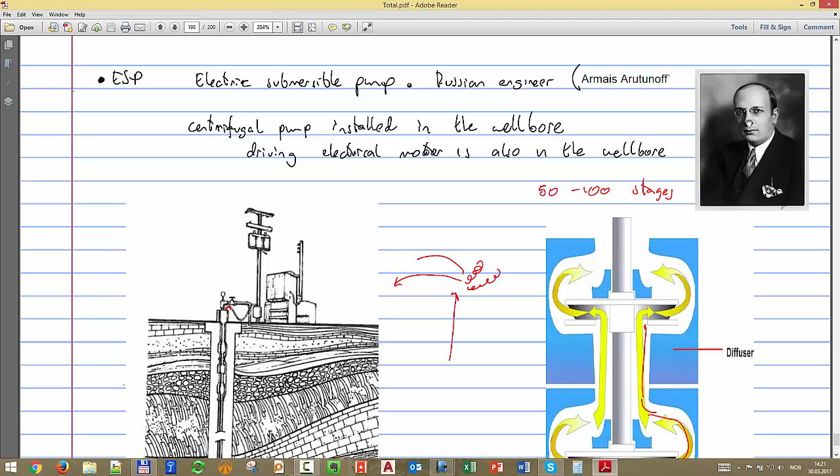And you have main manufacturers of ESPs: Schlumberger, Baker Hughes, a company called Wood Group, and one more, but I don't know. These are the biggest, but one of them, the main inventor with the patent, was the first one to try to put the motor and the pump inside the wellbore, which really made a huge difference in production.

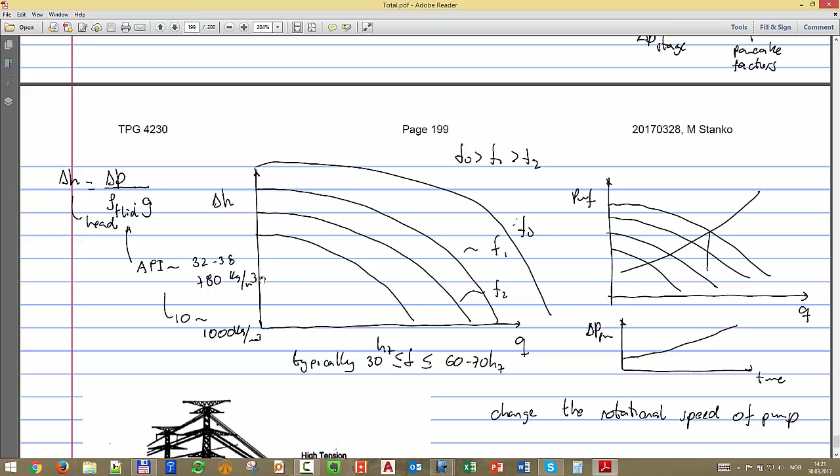Okay, so here were more generalities. I guess you had some theory about pumping, so this is not completely foreign to you, but it looks just like an inflow and available pressure curve, which makes sense. It's like something that gives energy, and it also makes sense that when we increase the flow, the delta P will be less, what it can reach is less.

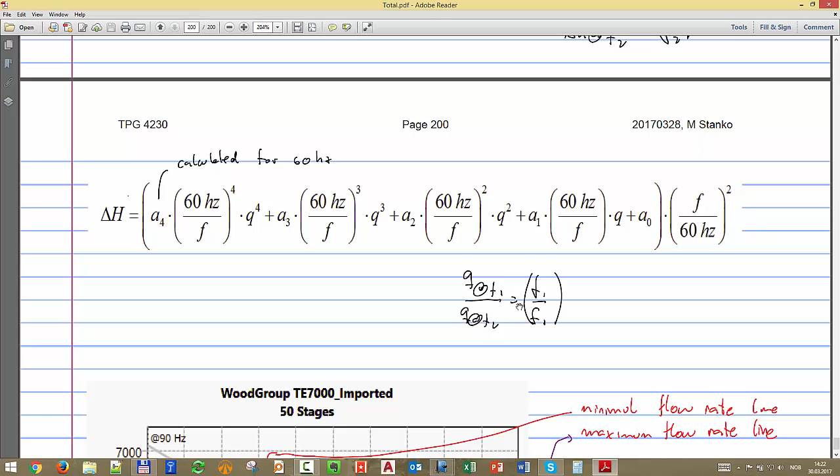We also saw what happens with frequency, how we change frequency, and how we scale the equation. Basically, we say that the head is scalable with the square of the frequency ratio, and the ratio between the rates is also proportional to the ratio between the frequencies.

That's not the most popular option to do in subsea wells. Why? Because you have to intervene at least, I think the longest might be around 2 years, but if you have problems at 6 months, then you have to make an intervention, and it's a big thing to do subsea to change something. Remember that the pump is screwed in as part of the tubing.

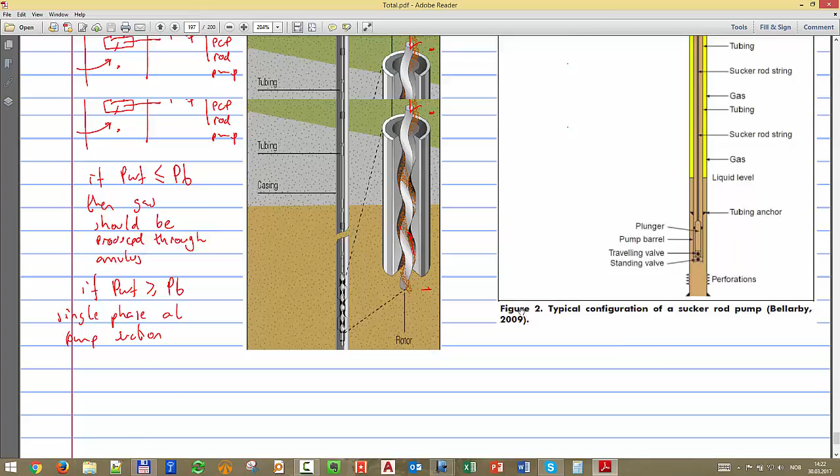I think we had a picture someplace of this typical well that you have to remember to sketch also. If someone wakes you in the middle of the night and says make a well with an ESP, you have to be able to do it.

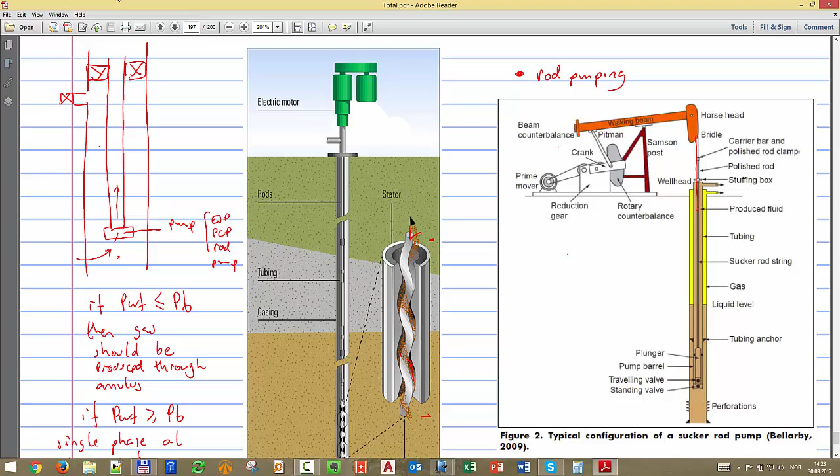So in that picture, it's really screwed in, part of the tubing. So to pull it out, to make maintenance, to observe what happened, you have to pull the whole thing. You have to take out the Christmas tree. You have to take out the tubing hanger. Then you have to take out the tubing. So it's a big operation. You have to kill the well. You have to put a plug. It's a big operation, so it's something we usually don't want.

It's not very popular, unless - and we are going to discuss that case - we have an exercise now in class for when you have a dry Christmas tree, when you can have a drilling module and access intervention to the wells whenever you want. It's also very important when you have low GOR, heavy oil, for example, and when you have large amounts of water.

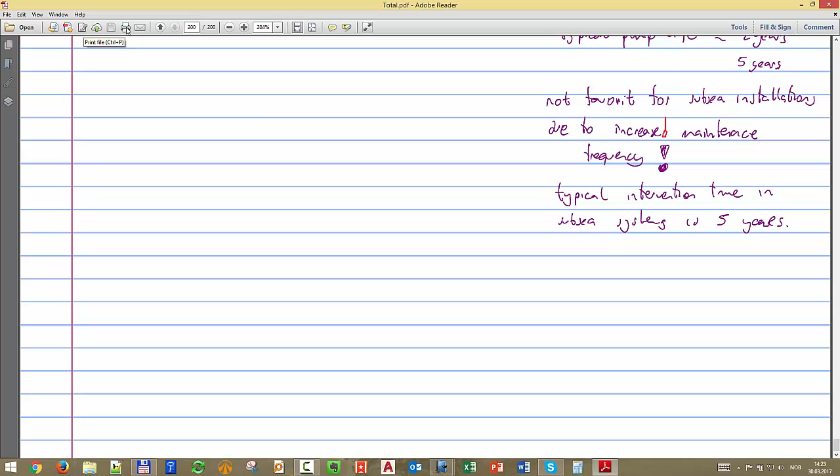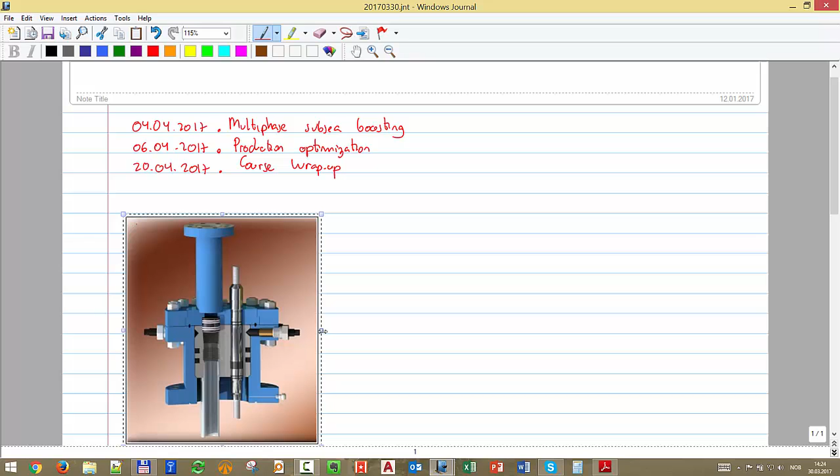So let's first show you just a picture of this penetrator that I told you about, that is in the tubing hanger. So here you see that's the tubing. The hanger is the gray part, and then you have the penetrator that goes through.

It's a hole, you could say it's a potential leak path, where you have the cable going from outside. Here you have this variable speed drive, you have the main transmission line for electricity, or a diesel generator, and it goes inside the well. There are many parts, and this is for a very simple onshore well. When it's subsea, it's more complicated.

So now, something that we have seen so far - what kind of, so first we say, limitations so far, operational limitations of ESPs.

So one of them is the frequency. Frequency has to be usually between 30 hertz and 60 or 70 hertz. You can take it all the way to 70, maybe.

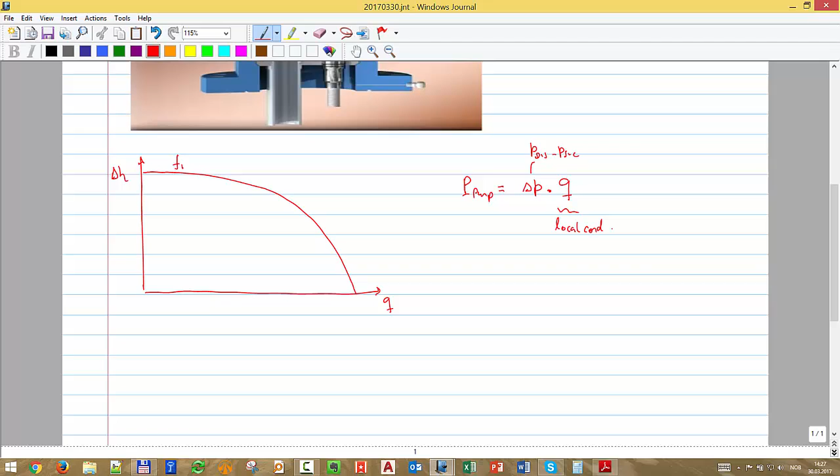Delta P, so P discharge minus P suction, times the Q, and the Q is in local conditions, and these units have to match. That's exactly what we are giving to the fluid - that's how you compute the change of energy of the fluid when it comes in and out of the pump.

But on top of that, the pump is using much more energy because you have some losses. In any process where you want to give energy to the fluid, you cannot give 100% of the energy - you have to waste a lot just to give it, and we will see where that comes from. So you have one term called hydraulic efficiency, and another term called mechanical efficiency. These should be divided: hydraulic efficiency times mechanical efficiency.

The hydraulic efficiency is basically due to many reasons, and I don't want to dwell too much into it, but it's basically because of fluid friction - friction between the fluid and all the walls that you have, which might be stationary or rotating.

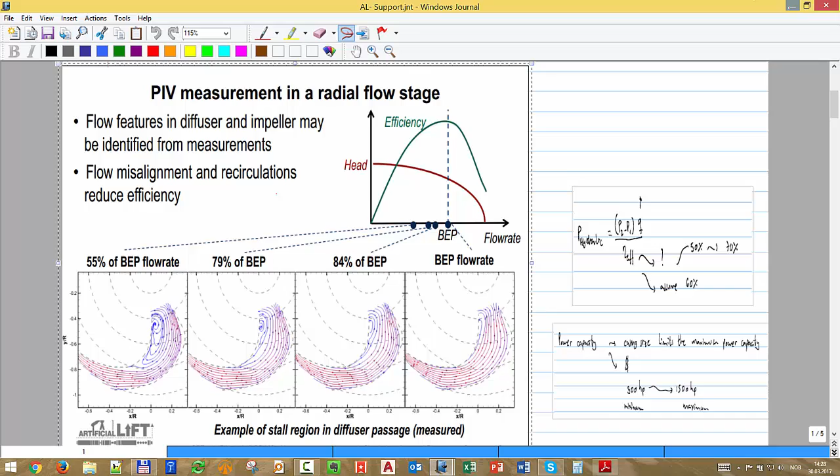Let me pull up an image that I think is very nice. You see you have the same head versus flow rate, and that's usually how the hydraulic efficiency goes. You have one rate - at that particular rate, that is what we call the best efficiency point.

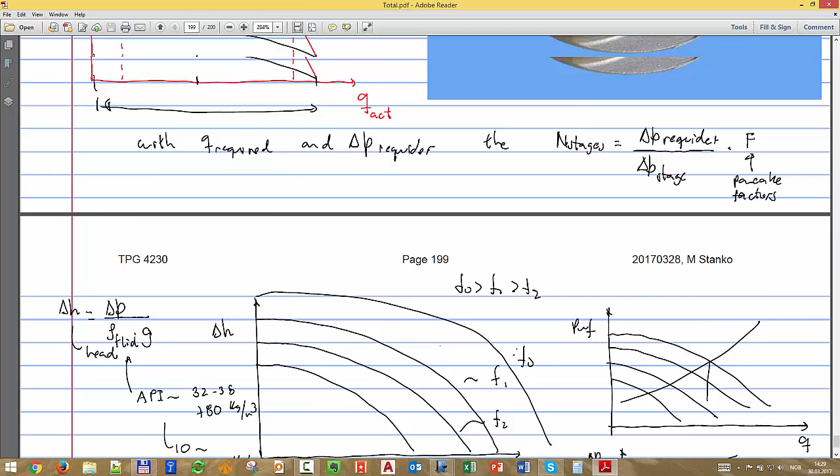At that rate, what happens is that the fluid goes first perpendicular from the top, and then it spreads radially. When it enters at a certain rate, it has to be completely aligned with the angle that you have.

If it's not aligned, if it's inclined or deviated, the fluid will start to separate. If that's one of the blades of the pump and it's exactly aligned, the fluid will follow exactly the profile of the blade. But when it's not aligned, the fluid will start to detach and create eddies, and the eddies cause loss of energy.

You can see that very clearly - that's actual measurement, taken with particle image velocimetry. You don't have to know what it is, but that's actually measured. You see at the best efficiency point, the lines follow exactly the path between the two blades, without anything else.

But when you move and change the rate, the angle changes, and when the angle changes you start getting these recirculation areas. So the conclusion is that you have one rate at which you have the best efficiency, that you have designed your blades for. When you go outside that rate, either above or below, the efficiency will start to go down immediately. Keep that in mind - the efficiency curve looks something like that.

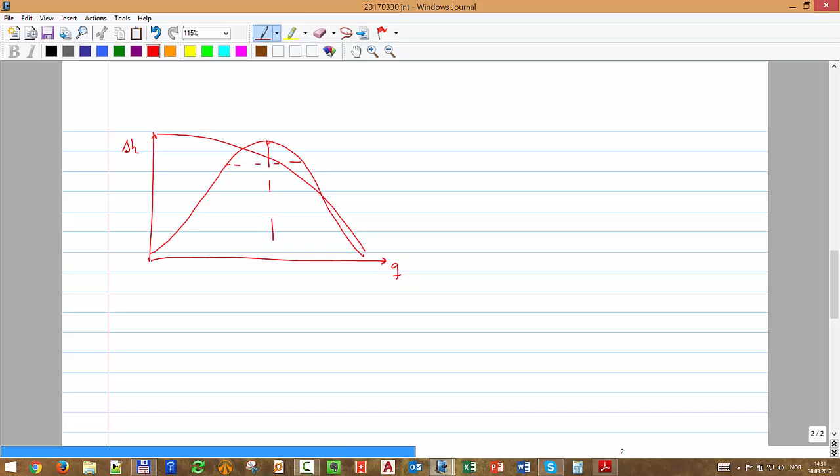Let me put that image here. I have delta H versus Q, and I have my curve here, and I have that efficiency curve that does something like that. When I change the frequency - that will be frequency 1 - when I go at a different frequency, frequency 2, the curve will move slightly to the left, and that efficiency curve will move to the left too.

So now the best efficiency rate will be shifted to the left. But you don't have to worry too much about it - just know that for each frequency, the maximum efficiency shifts. And of course we always try to be close to that rate. If you're going to design a pump, that's going to be the rate you want to produce from the well - you want that rate to coincide with the best efficiency point of the pump. But sometimes it's not very simple - we cannot ensure that we will be at that point all the time, and we will see several reasons why.

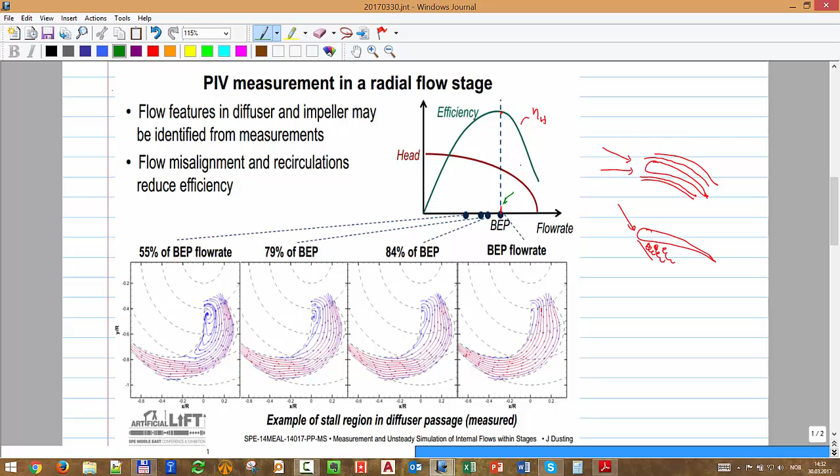Now there are some things - maybe I can show you that, since some people were asking how it looks. That's a relatively small ESP, but there you have the impeller. I cannot open it, but the fluid should be located like that.

Okay, the fluid is coming through that direction, that rotates, and then the fluid comes through this side. That's rotating, and the fluid comes from that side.

Here, if I take out that cover, I will see exactly those blades that I showed you before. Then you see we have one part that I told you is the diffuser. The fluid goes exactly out and then comes back again in this diffuser.

This diffuser again is a series of blades that expand, so the area when you enter is small and the area when you go out is big. They redirect the fluid, if you see here, through the other stage, through this small disc.

More or less, so I'm going to pass it around so you can see. Some things to note: this is missing what is driving this impeller. All of that is fixed in place, and this one is rotating, right?

So what is giving the motion to this is an axis that goes through all of them, but the axis is in place, and this is free to go up and down. So you need, if you see here, a washer that is going to be in mechanical contact with this part.

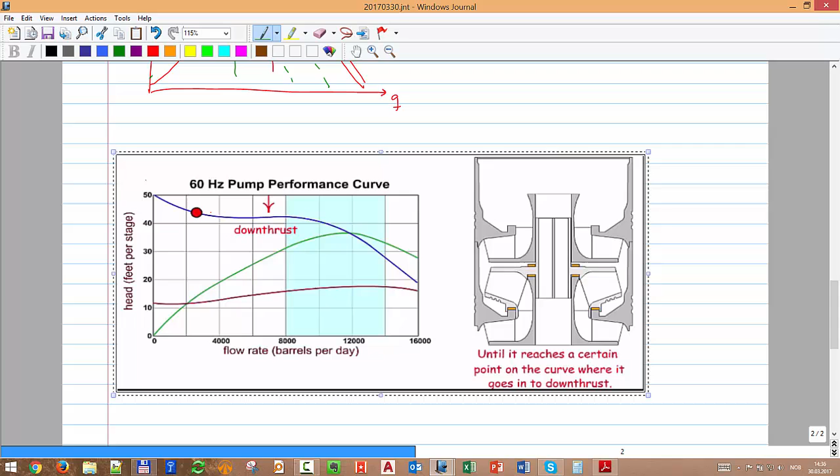So that's what we call down thrust, because the impeller is laying down on the support, on the hub of the pump. Now if we go the other way, to a very high rate, what will happen is exactly the opposite.

It will detach from that support, but then it will start hitting on the support in the back. You will see there is a small ring that is in the plate. And again, you have wear against a lot of rotation, a lot of heat, a lot of wear, and because of that you have failure.

So that's why you cannot be operating at either a very high rate or a very low rate. You have to be within a range where you have contact small enough such that you don't have important wear, so you don't accelerate the normal lifetime of the pump.

Is that clear? So that's just to show you, for each frequency you have to be within some maximum rate and a minimum rate that you have to operate.

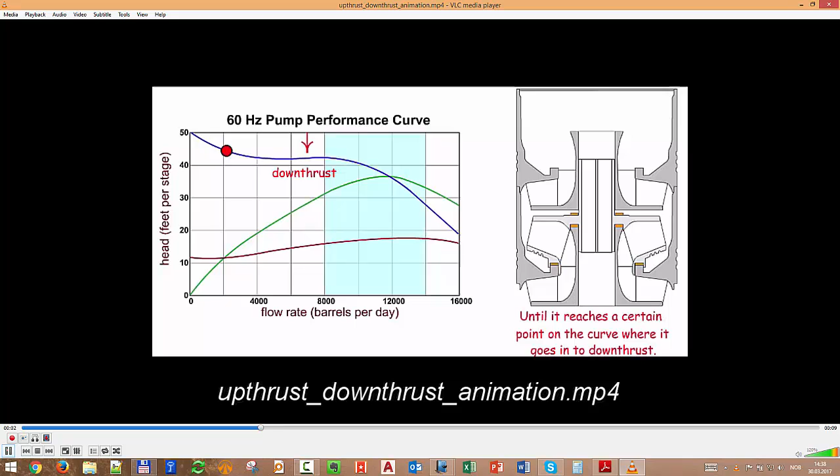Okay, so I define a region where I have an expected normal life of the pump, if everything else is okay. Otherwise, I will have excessive wear.

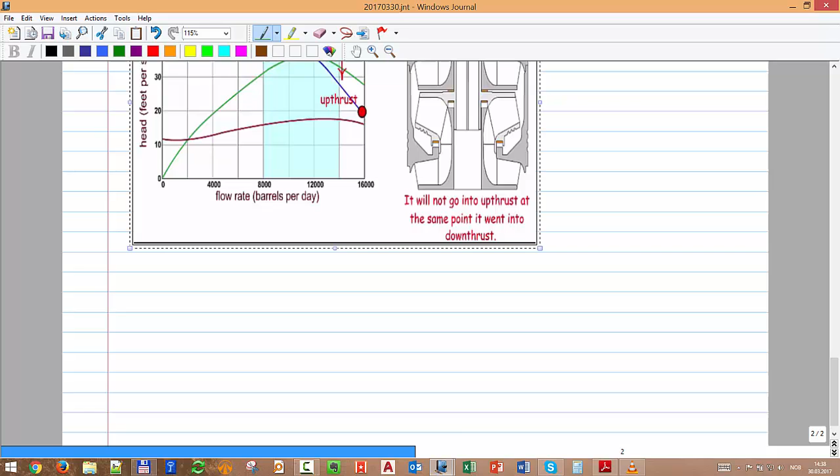I think here we have another nice figure showing something like that, where if you exaggerate the distance between the impeller and the shroud, it looks something like that.

So that's why, in theory, we have this very big range that we can use, but in practice I cannot. It's really not recommended that I operate below that or above that, so I limit very much my operational envelope of the pump.

And for different frequencies, that's how the curves go. Here I have what will be my Q minimum and Q maximum. So those are the main two reasons to avoid up thrust and down thrust.

And to avoid too low efficiencies when I increase or decrease too much the rate, that's the two things. I could just tell you the pump has two lines, that's all, but now you know the reason, so it's easier to remember in the future. Why do you have these two lines? It's low efficiency, you have this separation phenomena, and also you have up thrust and down thrust.

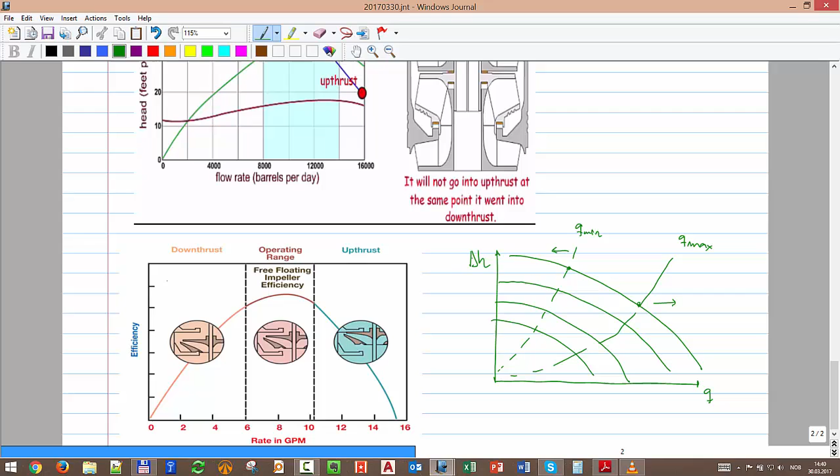At the end the area looks something like that, because you have Q max, you have Q min, maximum frequency and minimum frequency, and that makes a nice little box where all the Q delta P points have to be inside.

So for example, you go and run your simulations, and you say, okay, I want that particular combination. So I have to find a pump that will exactly cover all of them. Hopefully that's something we wish, but not always that it will be.

You remember this efficiency? You also have a line that goes a bit, sometimes closer to the minimum. It's called BEL, best efficiency line.

And it's telling you that's the rate. You remember where I had the maximum. You remember the curve of efficiency does something like that, so that's where I have the maximum. Then if I reduce the speed, it will be a bit more to the left, and so forth.

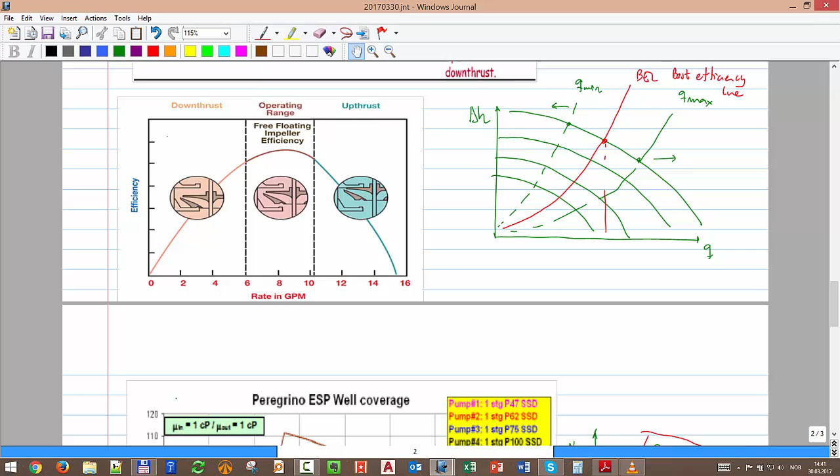So also that line, I should be operating relatively close to it. That means if I have two pumps, one that is maybe like that, very big, and another pump which is maybe like that, also very big, I will try to use, for example, this pump, the...

How do you call this color? Magenta? Yeah. My wife will be proud of me, huh? She's always asking, you cannot see the difference. No, I say, for me it's like red and pink. It's not pink. Okay, so we get into a small discussion, but now she will be proud.

So we try also, if possible, that it will be close to a good efficiency, because we want also to save.

Then one thing where I have a constraint: you see the operational envelope usually is like that, the suction pressure above saturation pressure. And also one more thing is the maximum capacity, power capacity of the motor.

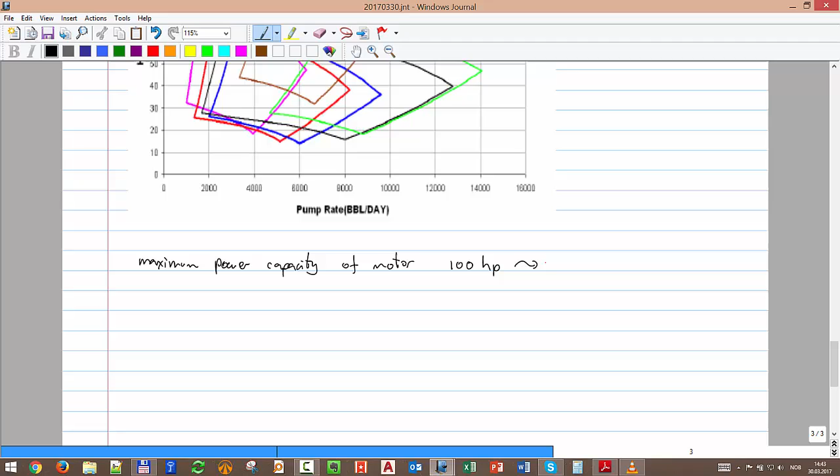So the motor usually can be anything between 100 horsepower to 1600. That's a very huge pump.

And you have to be sure also that the power you calculate, which is equal to delta P times Q over hydraulic and mechanical efficiency, has to be all the time less than or equal to the maximum power that I have installed.

And first, it's expensive to get a pump with a bigger motor, and then also the motor is bigger. So for example, if I want to put 1,000 horsepower in a very small casing well, it won't fit, it won't go through the casing.

So those are other requirements that we have to care about. And then there is another one that is called cavitation.

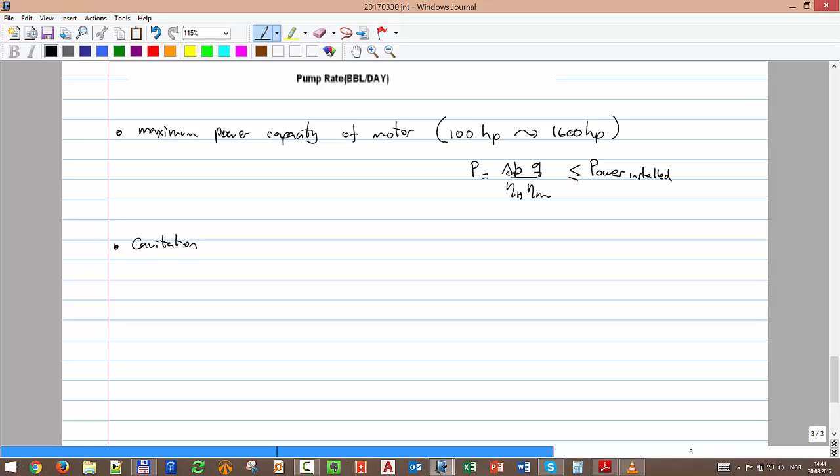And that is if we take the pressure, and that will be kind of the distance along the fluid, or in the flow path, from pump inlet to pump outlet.

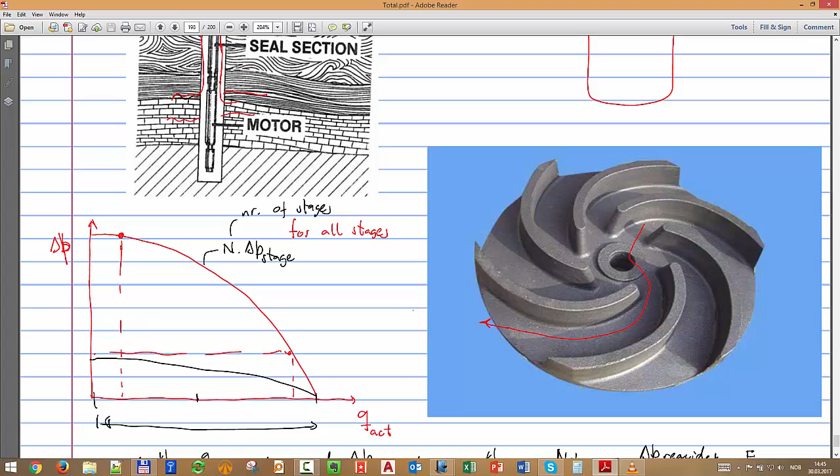Initially, when the fluid goes from the inlet all the way to the blade, it's going to have some losses, so it's going to have a drop in pressure, and the velocity is going to increase a lot because the channels are going to be made very narrow. Because of that, you're going to see a certain behavior.

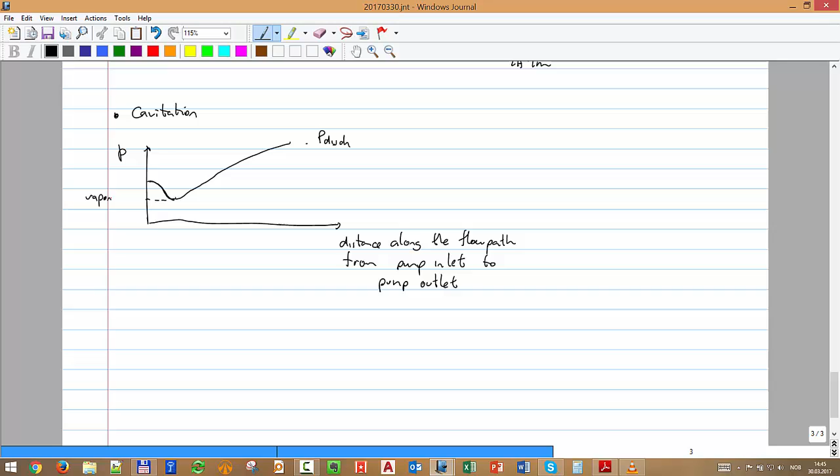Initially it's going to reduce, and then it's going to increase and increase until the pressure reaches the suction pressure, the discharge pressure. Exactly in this path it's very critical that we don't reach what's called the bubble point, the vaporization pressure of the fluid.

Because of that we have a phenomenon called cavitation. The fluid close to the wall vaporizes, becomes vapor, but then later on it will again have higher pressure, so it's going to re-condense, re-liquefy. But when it does that, let me show you the picture.

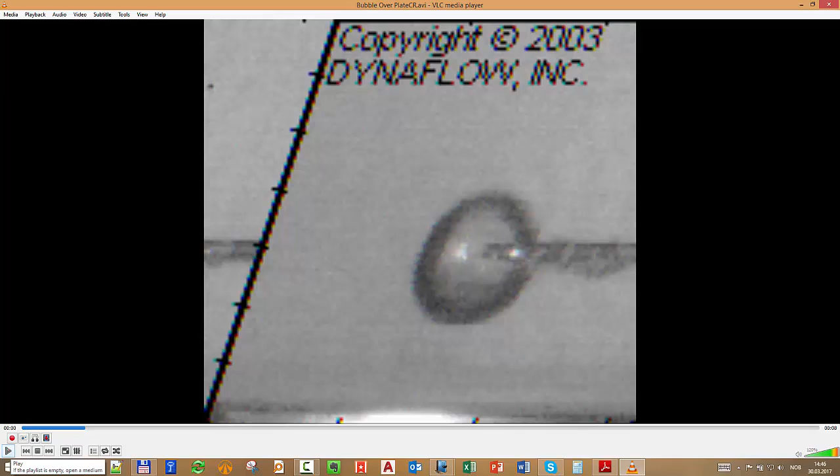In this case they are doing the same thing, but they have a small electrode, and they give a small charge to make the bubble vaporize, and you are very close to a wall. So when the pressure goes down, you reach the vapor bubble point, and you see after the pressure returns to a higher level how it hits the wall. In the collapsing process, this causes a jet of fluid to go and impinge on the wall. That's what we call cavitation.

Because of the repeated effect over time of all these droplets collapsing on the wall, we have wear of material, and we are going to be losing part of the blade.

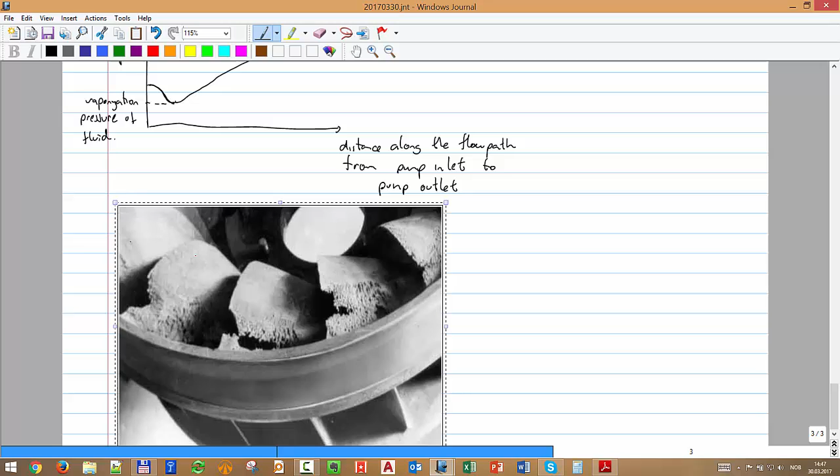I think we have some pictures - it's not exactly from an ESP, but you see how the damage can occur in the blades of the pump, which again reduces the lifetime. Again we have to pull out; we don't want to make interventions so often.

So what we do is just say that P at the suction has to be greater than P limit - that's not the vapor pressure, because there will be losses. P is the P at the inlet, and you have to be sure, not P at injection but P at inlet, that it's high enough that you are far away, within a safety factor, from that vapor pressure.

Usually we don't want to go into how it's done in practice, but manufacturers have something called NPSH - just to make you familiar with the term, net positive suction head. Remember, pumps started with pumping just water.

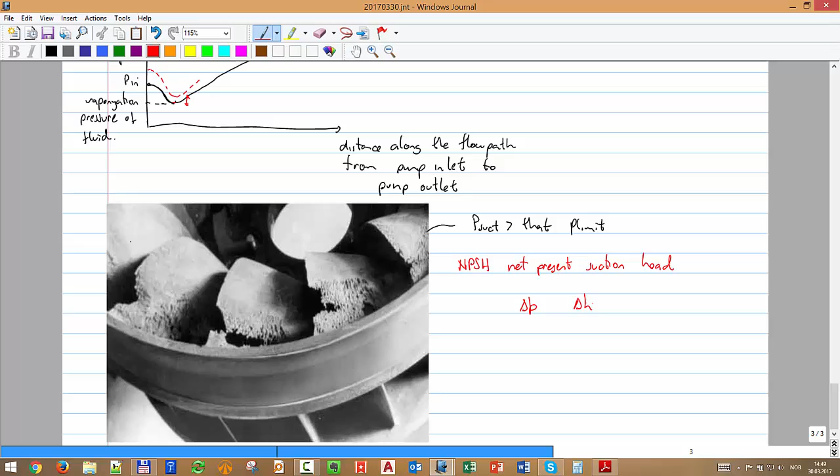It was later that someone started using pumps for oil, for any fluid you want, but people were working mainly with water, so they said, why do we want to carry delta P for everything? Let's just carry delta H, since we know density is 1,000. But then people started using oil, so all the time we have to make the conversion. The net positive suction head is given in meters, and then I can change that, using the density, to pressure in bar.

So if you see that term in a pump manual and don't know what it is - usually, if the flow rate Q increases, the NPSH is also going to increase. Why? When the rate is higher, you have more losses from this point to that point. So you should have a higher pressure at the intake, because you have more losses from the inlet all the way to the point where you're sure you have the lowest pressure and cavitation will occur.

But if you go to your pump specialist in your company and ask, what is the minimum pressure you want to have in the suction, they can tell you. So far so good - that's the place where cavitation occurs.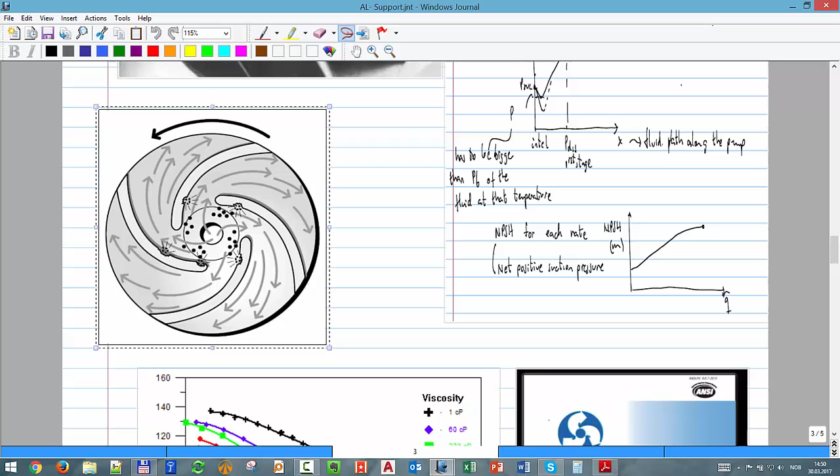We are almost finished - you might wonder, why do we use pumps if we have so many constraints? It's like we have this, no you cannot do this, not that. So that's the place where the pressure is the lowest, so you have the chance - pressure is lowest there, then pressure increases again, and then you have cavitation. It's like a small jet, but it's working all the time, making damage on the wall.

So then comes the last thing I want to say about pumps - the last restriction, the effect of viscosity. Usually the pump's effect of viscosity...

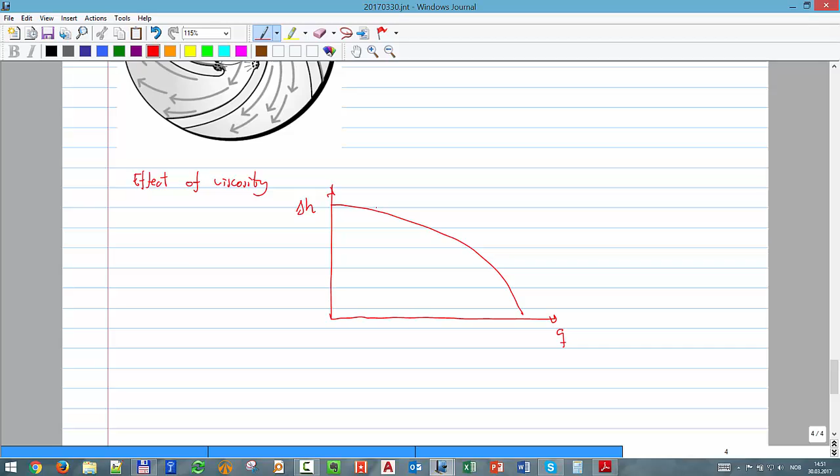Again, if we are using water, these curves are usually created for water, even for ESPs. They come and test it with water, so that will be viscosity equal 1, the viscosity of the water. But if you have another higher viscosity, the curve will look like that. You will have a reduction on the head that pump can deliver, and it's because of all of these losses. Remember that the curve is like that because of all the losses. So that's viscosity that is higher than water.

Also the lines are shifted, and we will see an example now. The minimum lines are shifted to the left, and also the maximum lines are shifted to the left. Also the efficiency is shifted. So at the end we end up with a very reduced operational region compared to what we had with just water. Viscosity reduces the operational envelope of the pump.

If you remember, sometimes oil in reservoir conditions can be very thin, can be 0.3 centipoise, something even less viscous than water, but sometimes we're working with viscosities of 300 centipoise in reservoir conditions, or 500 centipoise. So there, if you design your pump, you have to take into account the effect of viscosity.

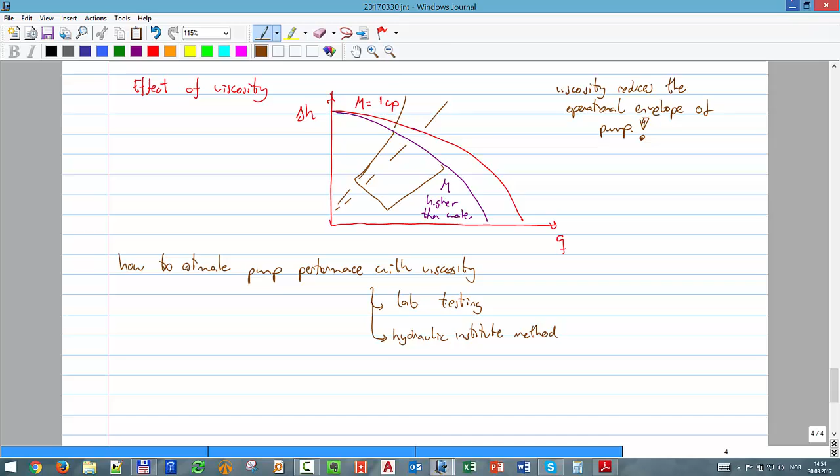Or another way, the most extended method to calculate that, is called the Hydraulic Institute. They took measurements for a lot of pumps, a lot of manufacturers, a lot of fluids, for different viscosities, and tried to compound and squeeze all of that into some correlations, some plots. I have programmed that for you in the exercise we're going to make, so you don't have to worry about it. But if you're curious or need to use it professionally, usually it's pre-programmed in software like Prosper and PipeSim. But it's good to know where that model came from.

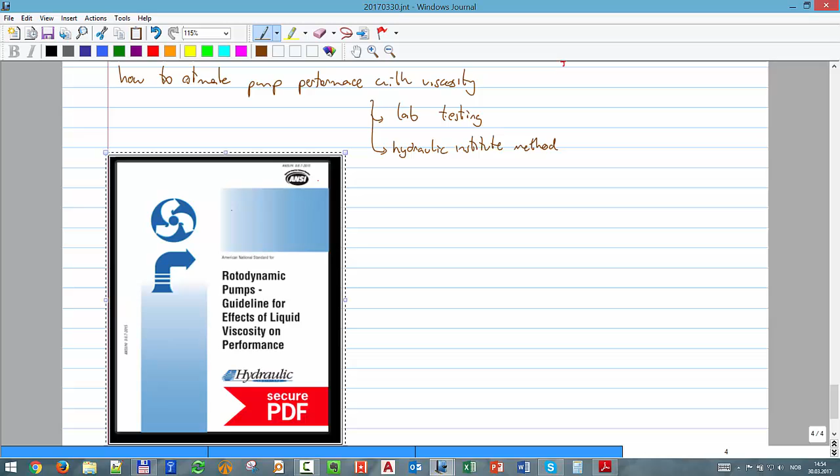But still people say it's not 100% accurate. I have read papers that say it's within 30% accuracy, or 50%, or 10%, so it depends really on the case. But at least it captures the main effect.

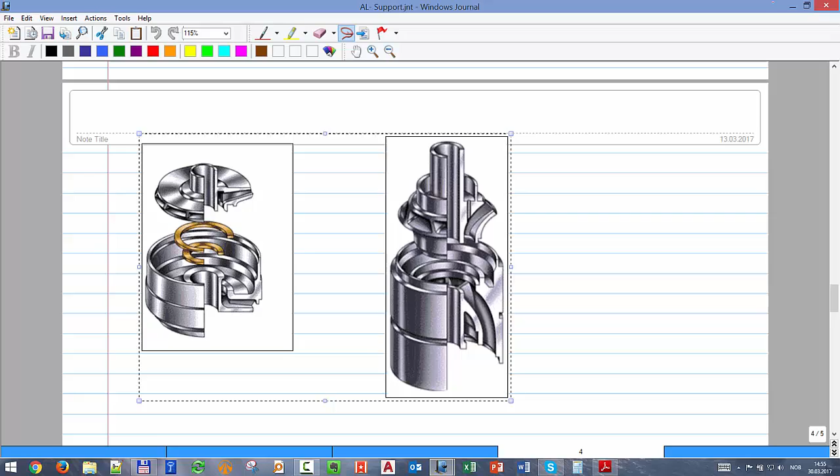So now, before I give you a break and we come back for the exercise, I just want to show you how it looks when you want the ESP to handle more gas. You see the traditional configuration to the left? It's very radial. The fluid goes through here, and then it goes almost exactly 90 degrees. You can see it in the impeller you have there. The fluid goes and has to change direction quite dramatically. This is very good for increase in pressure, there you don't need many stages.

But it's very bad for separation, because if you have some bubbles in your main fluid, the fluid will tend to go there, and the bubbles will tend to accumulate against the wall, and they will start to create pockets. Like when you see, for example, your impeller under gas, you will see that you have some areas where you have an accumulation of these gas pockets. Because of that, it reduces the flow area between blades, and that is detrimental to the efficiency and the performance of the pump.

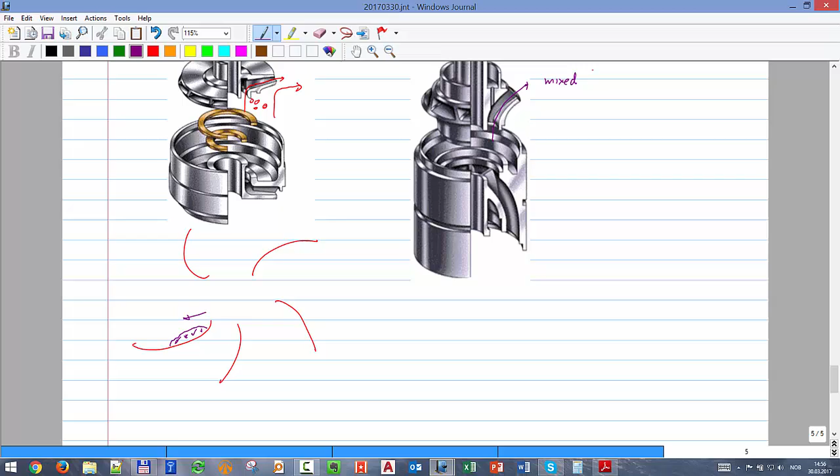While this other design, you see, is called mixed flow. Mixed flow means that it's a mixture between axial and radial, it doesn't go exactly one way, but something in between. The main disadvantage is that the delta P per stage is usually low.

That means I have to put more of them to achieve the same delta P. But the big advantage is that it's very tolerant to gas. When we say very tolerant, it's a GVF, gas volume fraction, and this gas volume fraction is at actual or local conditions, around 10%. That's a pump that is very tolerant to gas, because you avoid accumulation, you actually try to mix the fluid better with this kind of mixed axial design.

Why not put it exactly axial? There are some machines, like I told you, where the blade is something like that, and that's the hub, and the fluid just goes completely axial. That's a very poor drawing, but the issue is that doesn't lift the pressure much. You have a very low increase per stage, so you need a very large pump. When it starts getting very big, you have all these structural problems, with bending, so those pumps, called axial impellers, are not used in ESPs.

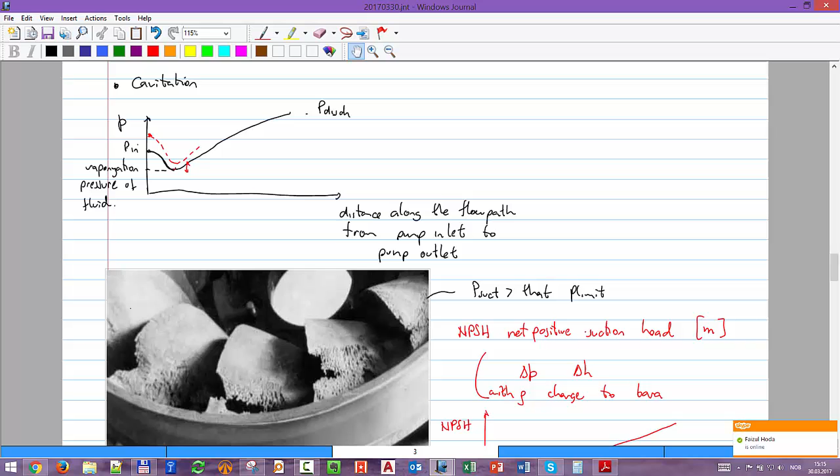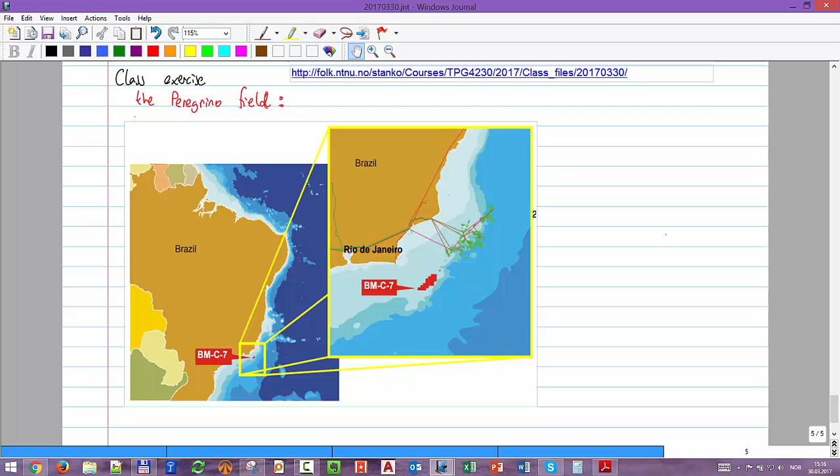Okay, so now let's do the exercise, it's in this directory, the common directory where we have all the class files, and it's going to be on the Peregrino field. Peregrino is an offshore field operated by Statoil, offshore, almost straight out of Rio de Janeiro.

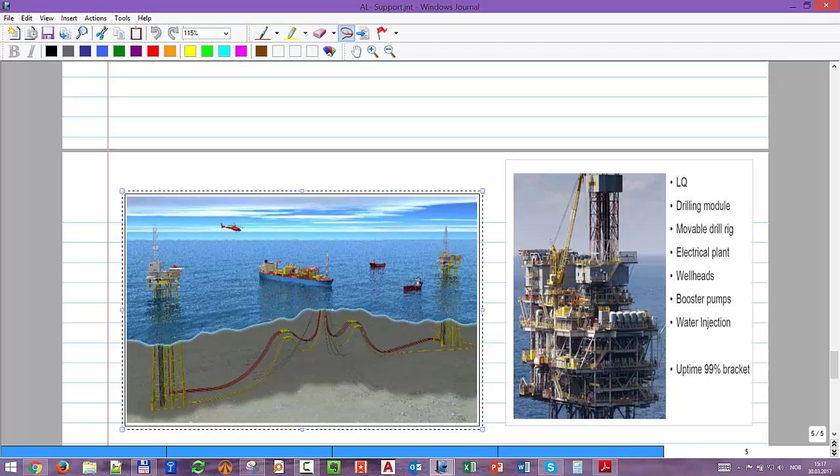Let's see, I think we have some pictures to show how it looks like. So there are two platforms, as I told you. When we have pumps, we want to have a way to make intervention, so we have two. Let me just put the other image right away.

Okay, and here I think I should expand the image a bit more. But the wells, you see the idea, one of them are drilled from this side to reach certain part of the reservoir, and the others are reached from that side. There you see the drilling tower where you can access every well and make intervention on them, also here.

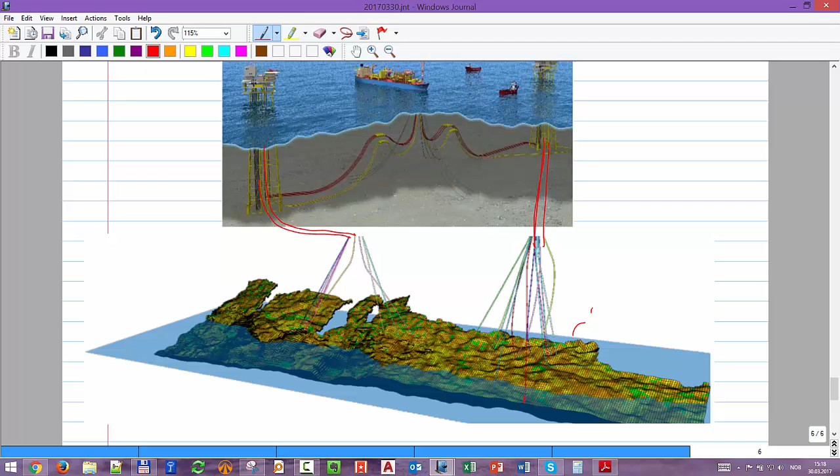And also we have oil producers, and the oil is relatively viscous. And we have water injectors that are injecting just in the, how do you say, the outskirts, is it the name? Flank of the reservoir. Yeah, the flank of the reservoir, exactly, that's the name I'm looking for, flank. Good to have some reservoir engineer that can pull you out of trouble.

And then later, so the system looks like, I have all the wells, okay? I commingle the production of all the wells, and then I have a pump, well actually here I have the separator, but I commingle the production through a riser that goes to the FPSO, to the floating FPSO, where the main processing is done. Okay?

And every well is producing, and they are almost at the same pressure, and this pressure in our exercise we are going to assume is 10 bar. Because it's like every well is producing to the same point, and I can control exactly the pressure of that point with the suction of this pump, and it will be 10 bar for us. So it's not a network, we don't have to solve a network, we can look individually at each well.

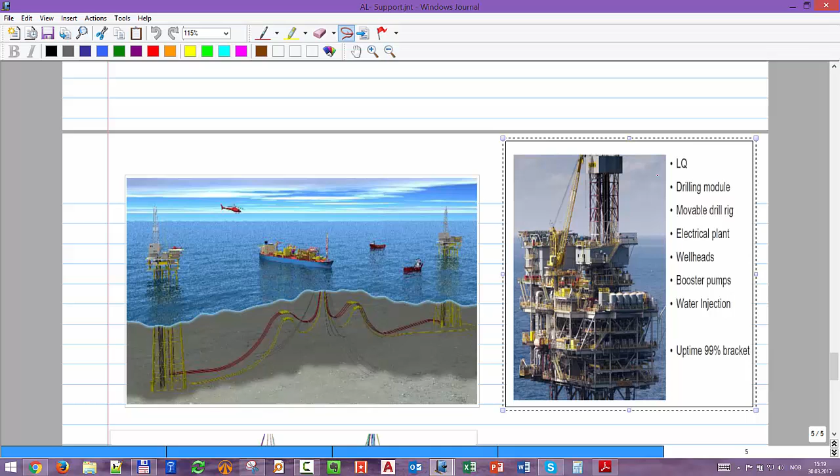So I think the other picture I had was of how it looks like. What does LQ stand for? LQ? Living quarters. Yeah.

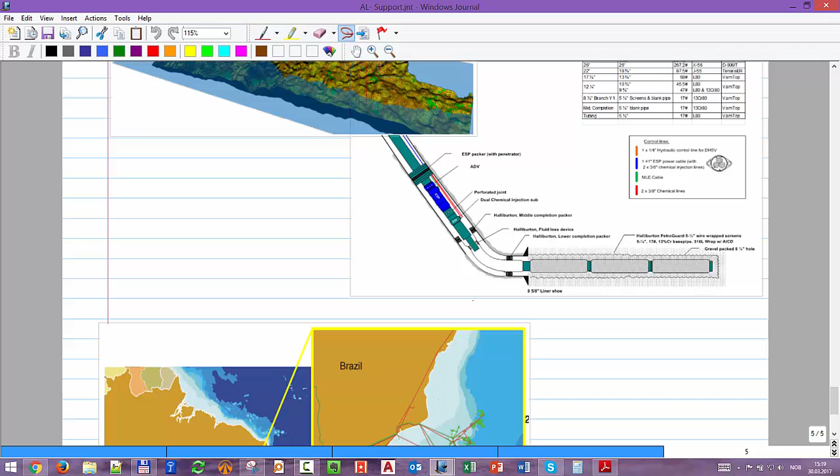Okay, water injection also there. And here is the layout of the well, and it has some things that we are not going to talk about completion. It's not the purpose of this course, but to simplify, we're going to say that it's deviated. Of course it's deviated because we are drilling from the same place, and to reach different targets we have to deviate. But we're going to assume just a vertical well for our case. We don't want to make it too complicated. And then we have ESP, and we have a packer here. Okay, and we have just a producing layer.

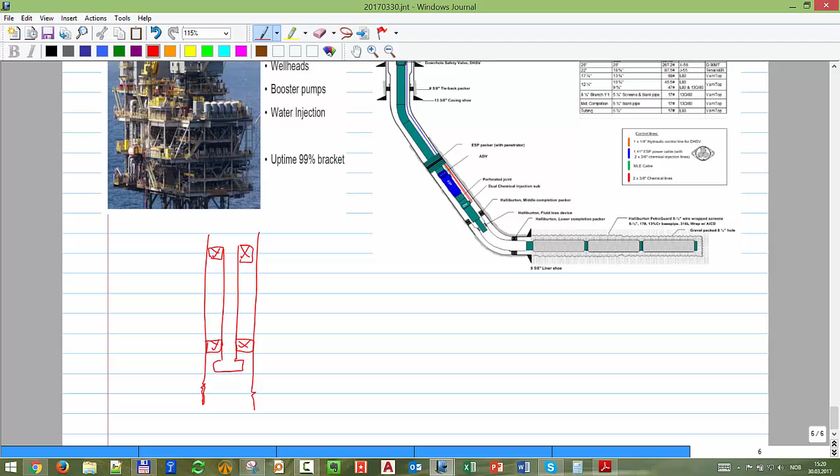And we are going to assume that, because here you have the inlet, the pump, actually the inlet is someplace here. That's the inlet of the pump. So you have some distance between, because the pump cannot go lower, that's another thing. All of that is rotating, okay? When you incline it, you will start to make contact between every part. Everything starts to make contact, the axis with the inner part, everything. So the pump usually has a maximum inclination angle where it can work. It cannot work like that. It has to be all the time almost vertical or very close to vertical.

So that's why we have to put it in the section where we have a good inclination in the wellbore. After that, the pump cannot go that low. So that H is what we are going to define here as the distance between perforations, H1, and then we have H2, which will be the height from the pump discharge to this point where we have fixed pressure. And you will say, okay, but here maybe the pump has also some length, might be 100 meters. Remember that we have to put usually 70 of these, then comes the motor, then the gas separator, so you can really see that it can become huge very quickly. But usually that is neglected. We just neglect the change in elevation due to the pump.

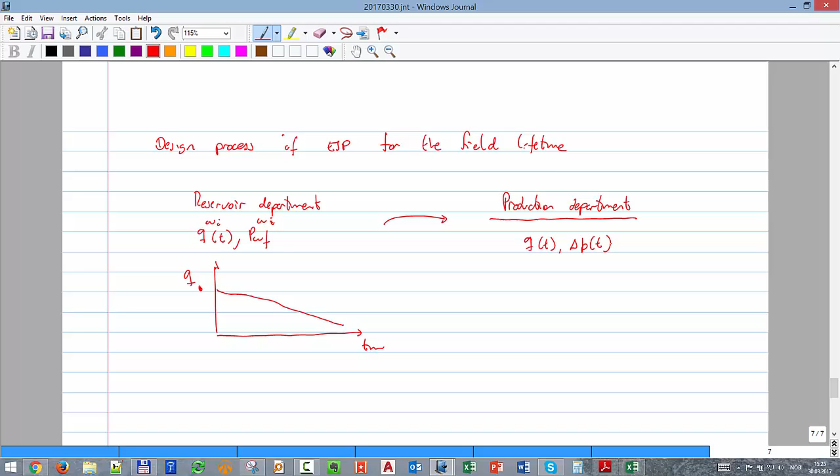But now they go to the production department, to the production engineer, and they ask, can we deliver that rate? And if not, how is the equipment? Please design an equipment that allows me to deliver that particular rate. And the first thing they do, what the production engineer likes to make, is available versus required. So they calculate for each rate in time also the delta P that you have to bridge with time. In our case it's relatively simple, everything is discharging at the same point, so we can say that's 10 bar, and we can very easily calculate the two curves, how they're going to change with time. But for a network it's a bit more complex, the network starts playing the competition between the wells, etc. So just keep that in mind.

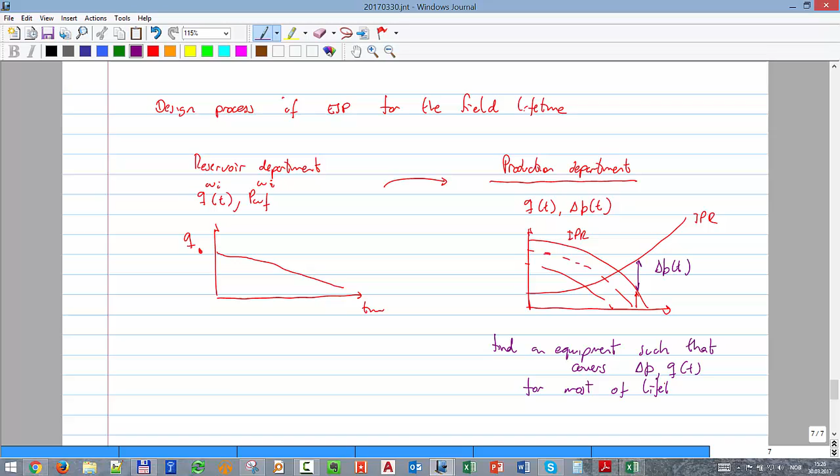But basically I say I have my IPR that is going to change with time, and I have my TPR that also might change with time. And I say I want that rate, that's what the reservoir engineer, my colleague, told me. I want to deliver exactly that delta P, and then they try to find an equipment such that it covers the delta P that you gave for most of the lifetime, and with high efficiency.

Not gas at the inlet, and at an affordable price. Of course, this guy has a lot of pressure. The reservoir engineer says, 'Give me that. If you do that, I will be very happy, and the company will be happy.' The production engineer then has to balance too many things, covering for this, for that, and at the end, the outcome is...

Yes, I found the equipment. I select an ESP model to produce, for example, from time 1 to time 3. But for another period, I won't be able to produce that rate. No chance, even by changing pumps, no chance. The pump will be too expensive, won't fit in the casing, or there's too much gas. So you cannot produce in this interval, T3 to T5.

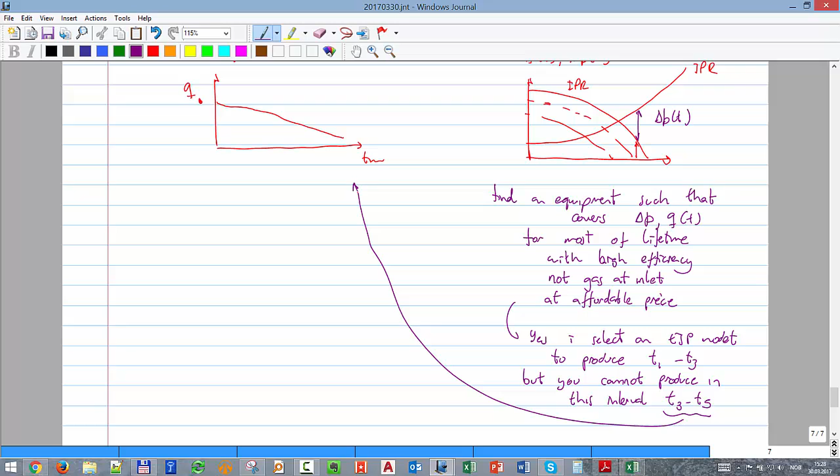So they go back to the reservoir engineer and say, that's my conclusion, and the reservoir engineer has to take those considerations into account, change their analysis, generate a new profile, take it back to the production department and say, now are you satisfied? And that process goes back and forth many times.

That's what we are doing in our exercise, and we are trying to see if we can fulfill what the reservoir engineer is saying that they want. So here we have the main data.

Initial reservoir pressure is 231 bar. That's the productivity index. We are assuming it's producing just liquid, under saturated fluid. Then we have H1, the distance from the reservoir to the pump suction, and H2, the distance from the pump discharge to the wellhead. Then you have the two diameters needed to calculate velocity. The pump name is Centrilift 675, from Baker Hughes, and has 78 stages.

So what do I have to do? Just compare available versus required, calculate delta P, and see if it falls within the pump map. The first thing is to calculate available pressure at the suction of the pump, required pressure at the discharge, subtract them, calculate the head, and then plot the head in the pump's map.

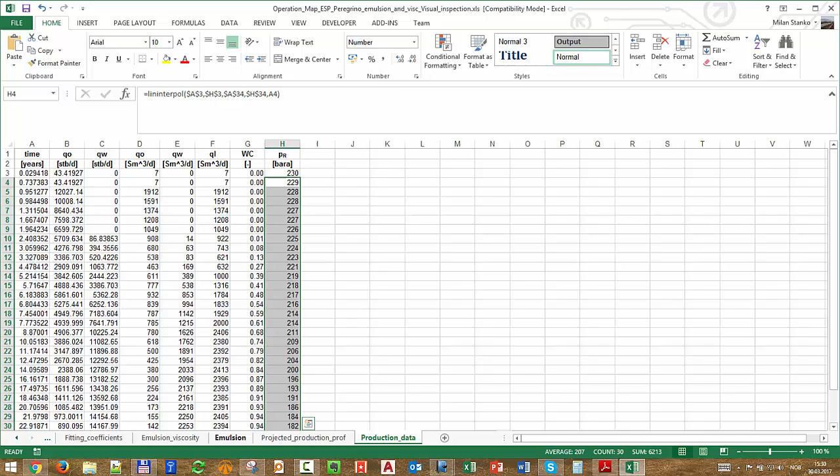One more thing, let's go to the full description. Here you have the production profile of Peregrino. Then we have this emulsion behavior I told you about, because we have a mixture of oil and water, if you remember - that was discussed a long time ago, in a galaxy far, far away.

You have the water cut, and you have something called the inversion point. When it's 0, you have the viscosity of the oil, then it starts to increase, and then decreases until you reach 1, which is the viscosity of the water. Do you remember that? So in this case we are going to use that equation to calculate the viscosity of the mixture. This is a big issue for Peregrino - they have to inject demulsifier to avoid the formation of this emulsion.

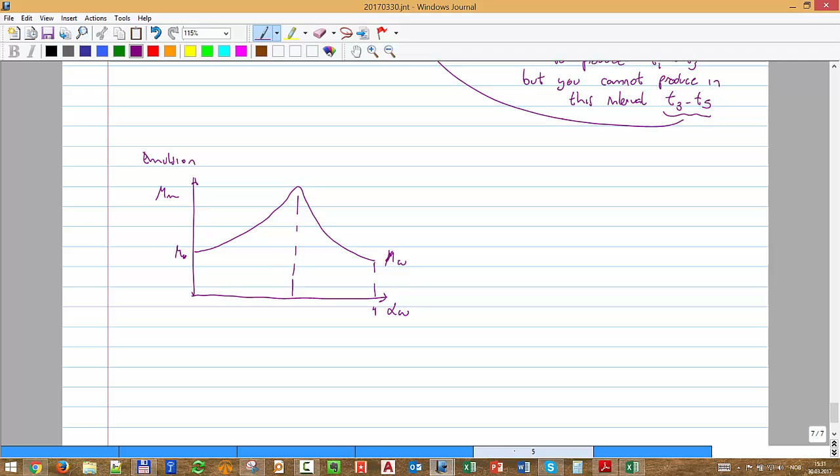So that's a plot, and here I'm plotting it in log scale. You can see it goes from - that was the viscosity of the oil. It's 0.1, I think that's in Pascal. Viscosity of the oil is 0.1. So that means how many centipoise?

100 centipoise, and it goes all the way to almost 1,000, almost 800. For the inversion point it's 60. Yeah, we are operating at 20, so we should be expecting a viscosity of around maybe 30 centipoise, something like that on the pump.

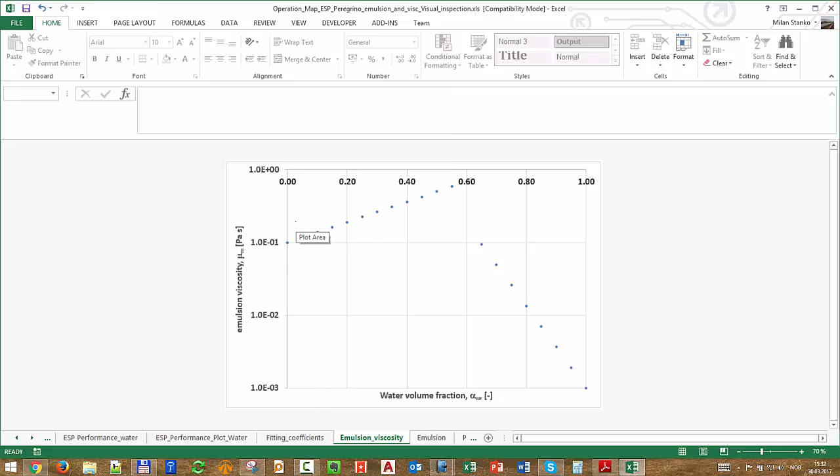Okay, then that's the data for one stage of the pump, and I made the homework for you. I just have the collection of points that's made for water, single stage. So I calculated the coefficients. Remember that we can represent it like a polynomial, so these are the coefficients of rate versus head, and also the same thing for efficiency. You see efficiency is not exactly like I painted, they have different shapes.

And that's how it looks like, the curve for the pump head versus rate for water, for different frequencies, and you have the minimum rate, the maximum rate line, and the best efficiency line. And that's using just the equations that I told you. I put the number of stages that I have, and then I change the frequency 60, 45, 30 using that equation.

Now, but when you have viscosity, it doesn't behave like that. But remember, it will be reduced - the performance will be reduced, and also the minimum and maximum lines will be moved to the left. So in that case, I have made the calculation for you using the procedure of this hydraulic institute, and for a viscosity of 100 centipoise, I get this plot.

Okay, here you have the original, so let's copy that. Okay, see, that will be the original, with water, and that will be with the viscosity of 0.1 Pascal second. You see that is significantly reduced. So the area that I have to operate is this map here.

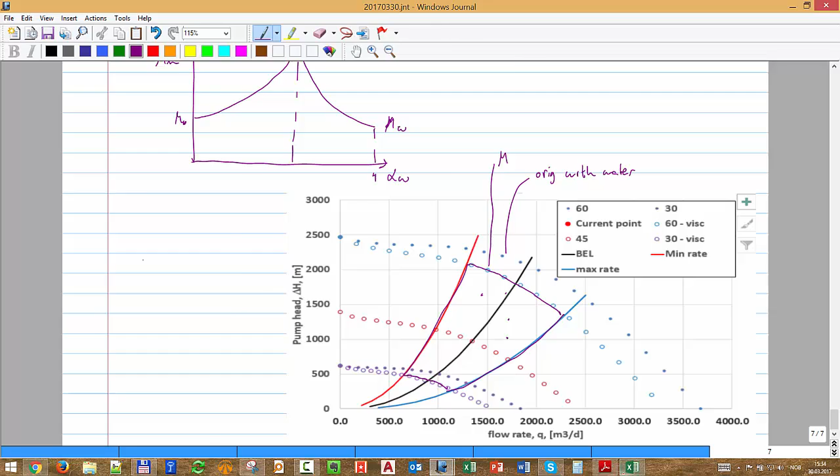Someone else chose a pump for us, and then we just have to verify if the points fall within the plot. And if you want to know the details, you can go to that sheet and change and see how it is calculated. But I had to generate - remember, Excel to plot, you need a collection of points, and I need to change the frequency and also the viscosity. Has to be an input. That's not so important for you, it will be like the expert did that.

Yes, so now let's do it for the first year. We are going to assume, to avoid complexity, because what happens if the viscosity of the mixture changes with time? If I say that the water cut, really I kept it constant - but in reality you saw that the water is actually increasing, right, from this plot. But if I make it like that, then the viscosity will change, and if the viscosity changes, I have to make a map for every year.

Is that clear? That's what you're going to get in the exam - no, just joking. But you will get a different map, so you cannot plot all the points in the same map. You have to make a map for every viscosity for every year. So that's why, to simplify, we say we just have the same viscosity.

Okay, so let's first calculate the... so we need average density. I think I have a function called average property, and here I need the property, the water cut first.

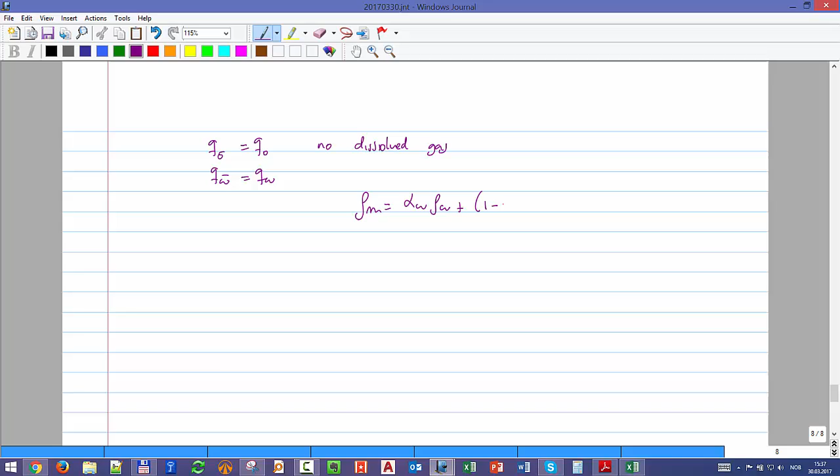So here will be average density, average property, and then that will be the water cut, the property of the oil, and the density of the oil - I have it up here, I block it - and the density of the water. And that's just making a volumetric average, like we discussed before in class: rho of the mixture equal to alpha of water times rho of water, plus 1 minus alpha of water times rho of oil. And we are assuming that Q water over Q oil plus Q water equal to Q water over Q oil plus Q water.

An assumption to make your life easy. Now, the effective viscosity, for that we need to use this Richardson. I gave you here this emulsion behavior. So for that, let's see Alt F11. How did I call it? You go to emulsion and Richardson emulsion.

If I'm above the cutoff value, this 60%, then I use the exponential equation for the oil, and if I'm below, I use the exponential equation for the water. If you remember, Richardson was the viscosity of the mixture equal to viscosity of the continuous phase times the exponential times a constant times the volume fraction of the dispersed phase, right?

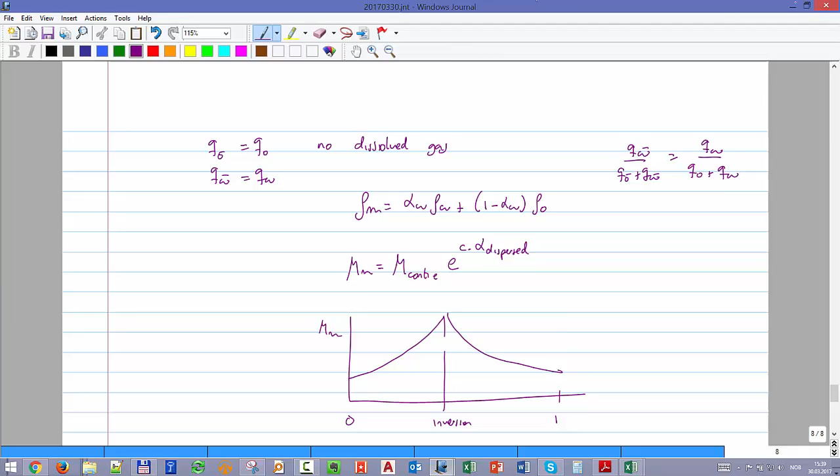And then I say I apply one equation for the left side of the inversion point, viscosity of the mixture, use one equation here and one equation here. Okay, two exponentials. So let's use that equation to calculate the viscosity, and that will be Richardson.

Richardson wants viscosity of the oil, so that will be this 0.1, and I have to freeze it. I'm also assuming temperature doesn't change much and pressure doesn't affect the viscosity much. Viscosity of the water as this value here. Then alpha of the water is the water cut, right?

Then the exponent for the oil, that's 3.215. I also block it. And the exponent of the water, it's this one, 13. And the cutoff is 60%.

Okay, so that gave me an increase of, just to make quality control, that gave me an increase of 30%, more or less, in the viscosity. Just because of this emulsion behavior.

Okay, now I have to start moving. Now I have everything I need. I have the density, I have the viscosity, and I have to move now from reservoir pressure, co-current, to bottom hole, co-current to the suction of the pump. So first, which equation do I need to use?

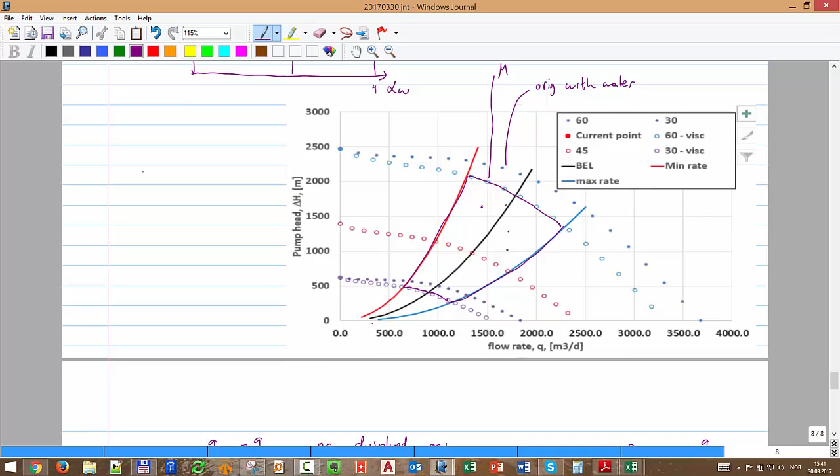Yeah, so I'm producing very little water and more oil, which makes sense. Now I want to move from the bottom hole. Okay, where was our... from the bottom hole all the way to the suction of the pump, and that will be just flow in pipes. Okay, that will be just single phase flow in pipes, but using this viscosity of the mixture, because that's how we represent emulsions. Like one uniform homogeneous fluid, but that exhibits this mixture viscosity.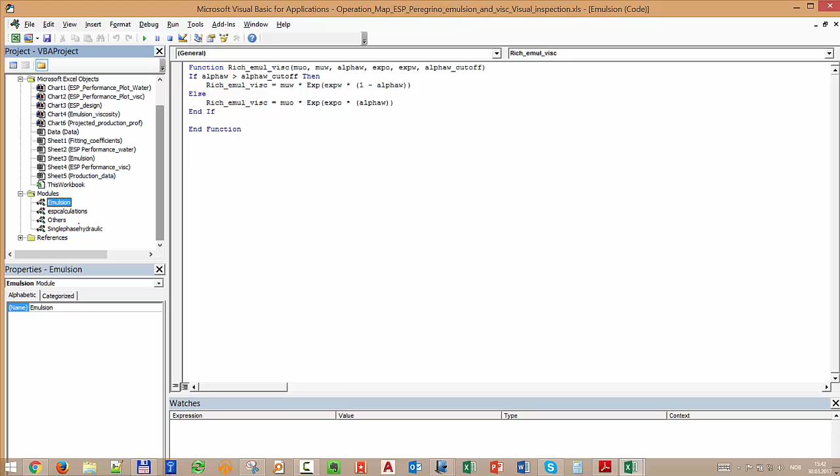So for that, I'm not sure exactly how I call the function. Let's see back. What do we have? Single phase hydraulic on that module, and it's called P in. That's not what we need. Okay, we want P out because we are moving co-current. So let's see if we have another function called P out.

Yes. So you say I need the rate, I need the internal diameter, I need the density we have, viscosity we have, length we have also. Theta is the inclination angle with respect to horizontal in degrees, P inlet, and the roughness. Okay, so I think we have everything.

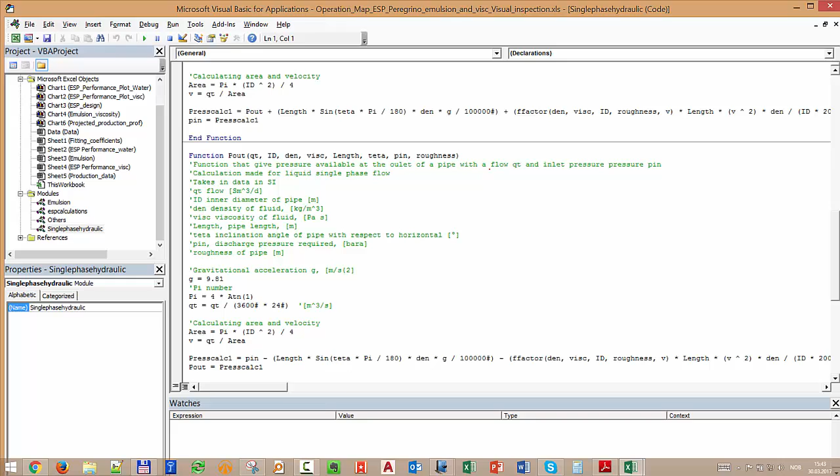We can try to. Okay, and the way it works is just using the friction factor, just like what you have learned in your studies. Friction factor, Moody diagram, etc. So that will be P out, and let's see if we have everything we need.

Total rate, that number. I don't want to block it. Internal diameter. Initially I have flow in the casing, so it's very big, the diameter. I block it. Then I have the density, and that will also remain constant, but in time it might change. Viscosity, in my case, remains constant, but it also could change in time. Length of that section will be h1, right?

I block it. Theta is the inclination angle, and we are going to assume, just to make it simple, that it will be just a vertical pipe, so it will be 90. P at the inlet is the bottom hole pressure, and the roughness, we have it here, tubing roughness and lines. Yes, and I block it. So I hope I didn't make any mistake.

We will see soon enough. So we got 75.7 pressure at the suction of the pump, and if you see here, the bubble point pressure is 30. So we are well above that pressure, and that's actually what we want, okay? That it will be above the bubble point pressure.

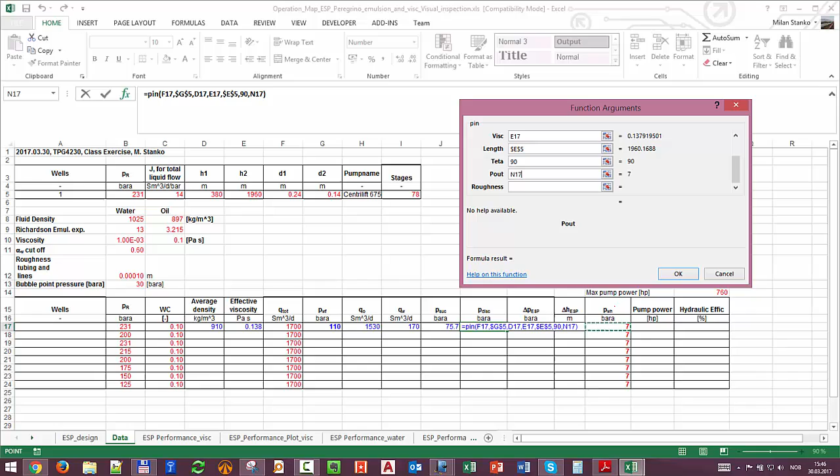So let's see, I need the rate, I need the internal diameter, that will be the number for the tubing. Then I need the density, which might change with every year, and the viscosity, and the length is that number here, and I block it. Again we're going to assume 90 degrees for the angle, and P out will be the wellhead pressure. And what else do I need? The roughness, and I also have to freeze that.

And it tells me that I need 188 bar at the discharge of the pump. Okay? So then I say the delta P of the pump has to be the discharge minus the suction.

And then I can calculate the head. And the head is, if you remember, delta P divided by rho, by density, but it's not only by density, it's also by gravitational acceleration, 9.81. But remember, to make consistent units, the pressure has to be in Pascal, so that's 1e5.

So we have the pair of delta H versus Q, and then I have to make sure to use the right viscosity. I have to take those numbers, 0.138 and 910, and go to my sheet where I calculate the performance map for viscous fluid for the pump, with 138 and 910.

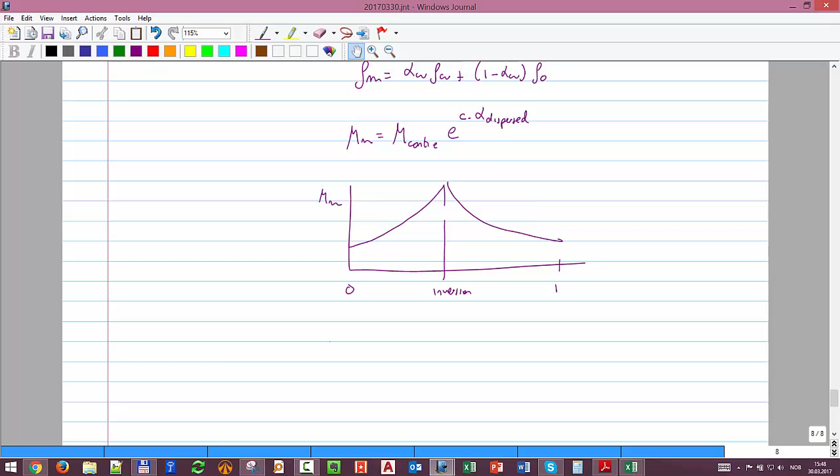Remember that we need... okay, that's what we got for the first point. So that was Q equal to 1700 standard cubic meters per day, delta P was close to 113 bar, viscosity was 0.138 pascal-seconds, and density was 910 kilogram per cubic meter.

Should we go to the next point? Is that clear how we did it? It's just the same thing we have been doing since the beginning of the semester: available and required. You see how powerful it is? You can use it for almost any task.

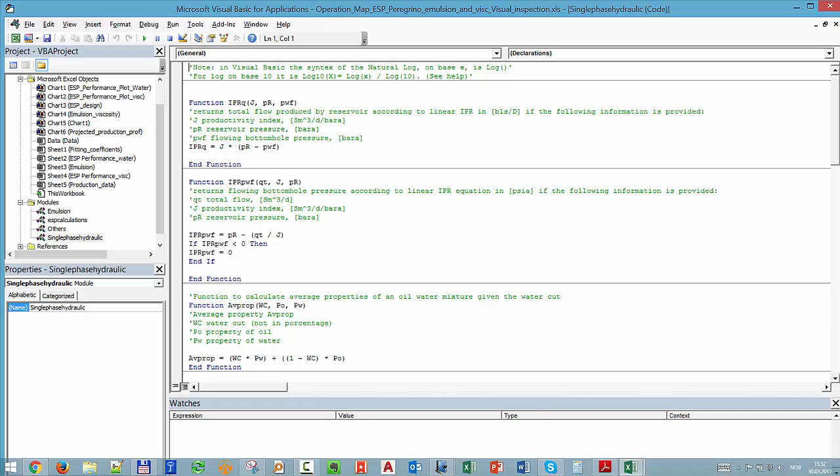And I need the efficiency. So for the efficiency, I think I fit a polynomial too, if you go to the end you have the efficiency, you have the polynomial, and then you have an equation for ESPs: pump efficiency. So I have to give the rate, the frequency, the reference frequency, and all the coefficients I just found with the trend line. Okay, so let's use that equation.

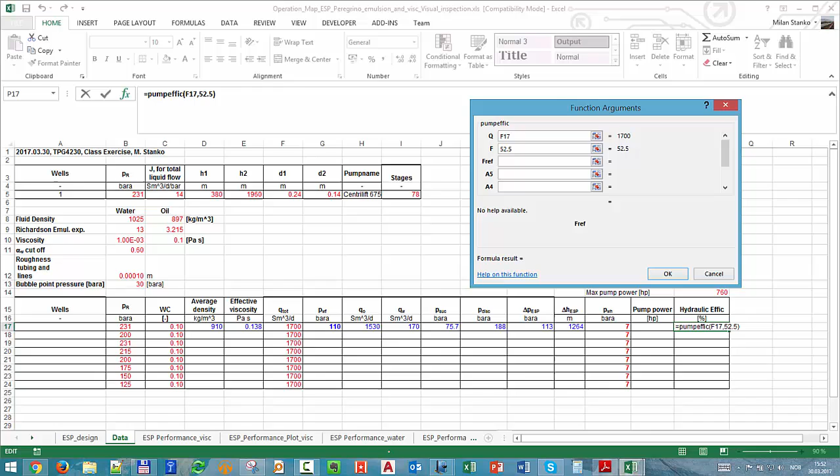Okay, hydraulic efficiency is going to be equal to pump efficiency, and pump efficiency wants to have the rate, which is the total rate, the frequency, which was 52, point something, 52.5 approximate. Reference frequency that I have here is 60. That curve that I showed you was made for 60. And all the coefficients, that will be...

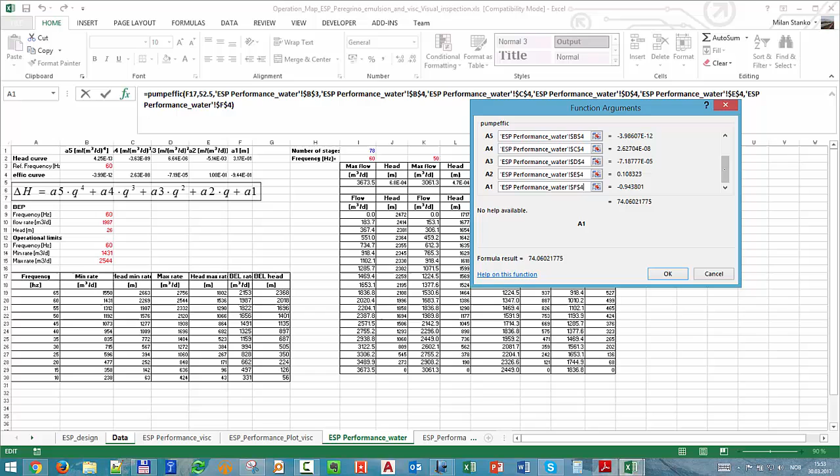A5, I have to block it, okay? Remember, A4, A3, A2, and A1. Okay, and it gives me an efficiency of 74%. It's a miracle that gave. Usually we have some bugs in class, so okay, 74 for that point.

And now I can calculate, I have the mechanical efficiency, and I can calculate the pump power. And that I do by saying delta P times 1e5, to have consistent units, to have it in Pascal, times this number, the rate, and I want to convert it, it should be in seconds, right? So I have to divide by 24 times 3600, right?

Okay, what else am I missing here? Delta P, Q, and then I need the efficiencies, of course, right? So the efficiencies will be that number, mechanical efficiency, and then I have the hydraulic efficiency, but I have to divide by 100. Okay, I think the keyboard died. No. Divided by 100. Okay, and that is in watts, I think, right?

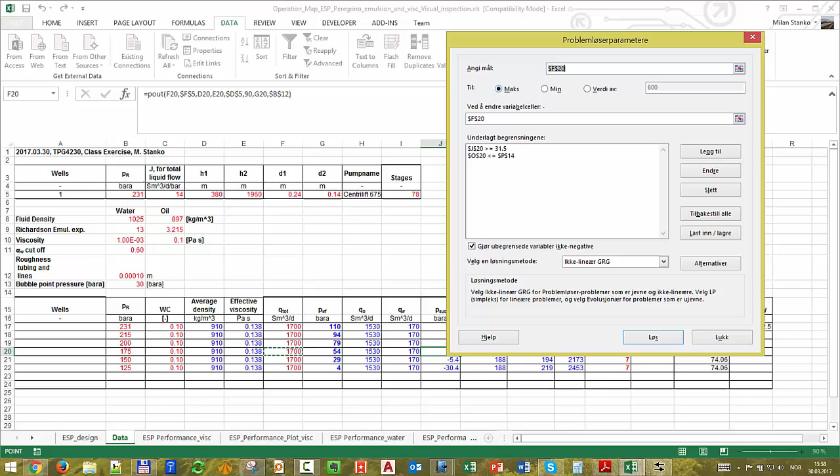Where is data, solver? Okay, and I had it already pre-filled for you. Is F, what is F? No, that's not, let me just delete all of that.

Okay, so I want to drive that value exactly to a number of 30. That was the bubble point pressure, and changing the rate, that number here, and let's see if it... yeah, and now the rate has to be reduced to 1554. Okay, and of course I want to be producing as much as possible. I can produce less than that, but then I will be losing production.

Okay, but really, to be on the safe side, what we can say is, required pressure at the inlet, at intake, pump intake.

Okay, and that will be the bubble point pressure times a safety factor. We can say, for example, 1.2, and 36. Because of all this cavitation issue, we can have losses inside, and we can have gas liberation, so let's say a bit higher than that. So we are going to solve again, and now it has to be 36.

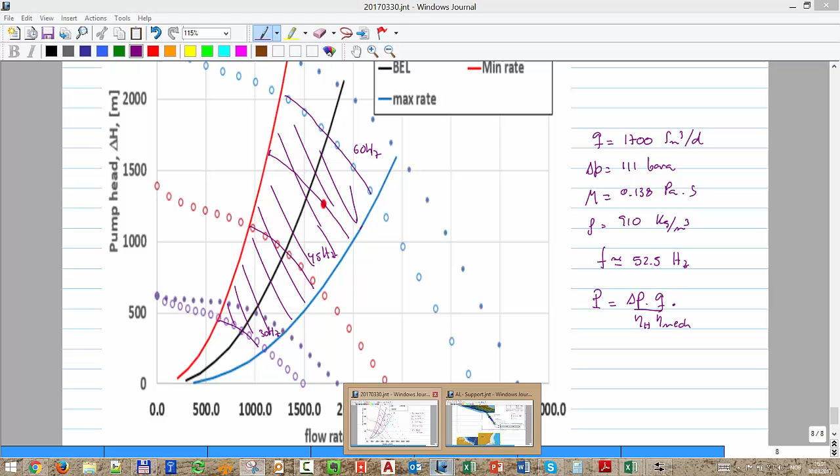Okay, so all of these points are feasible because they are within the envelope that I have, this one, if you remember. That point is just on the border, so that one won't be feasible to produce. So I have to bring it back. And how can I bring it back?

Reduce the rate, but if you reduce the rate, you're going to pull them more to the left, right? Increasing the rate, but if you increase the rate, you're going to get this bubble. So how do you bring back this point? Reduce the pressure.

Well, let's go back to that later, in a few minutes. So let's write first the frequencies for those. So that was 52. That will be how much? That is 7.5, right? So we divide by 3. That gives how much? 2.5, right? So that will be 52.5.

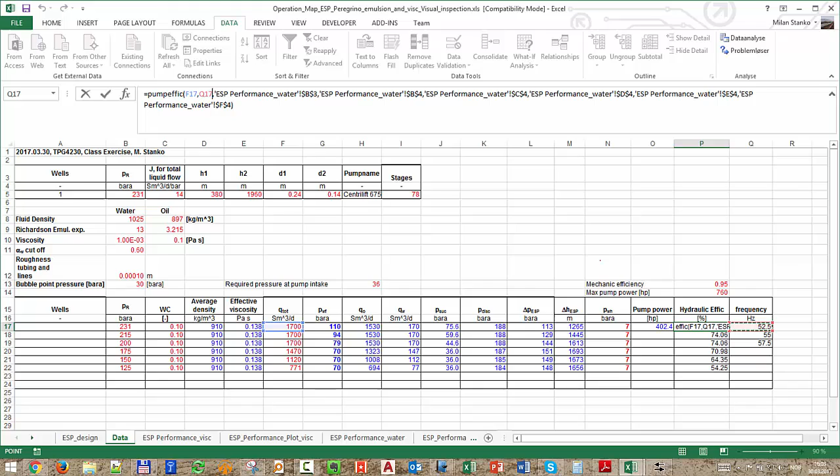Okay, and then I can drag it and calculate the power. Still the power is okay for those 3 years. So now let's see for the last year.

What is the frequency of that point? We can say 56 maybe. Yeah, 56, and then I drag down. I'm okay, safe with the power. So that pump that I have will be at least able to pump the first 4 rates.

But now what happens with the last rates? So how do we put those points back into the map? Well, the answer is you cannot. Because if you reduce the rate, the delta P will be less, so your point will be here, but you will still be outside of the envelope.

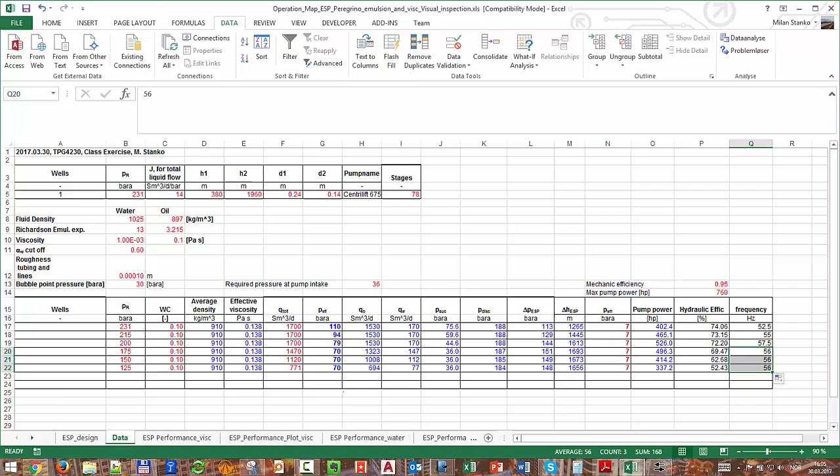Okay, so at that point, no matter what you do, you won't be able to put the point back into the envelope. So the only option is to go and change the pump. Just because there is no way. If you reduce the rate, increase the rate, you're locked because of all the operational constraints that you have. So at that point, you have to think, if it's after 5 years of production, about changing your pump, the model of the pump that you have, for a different model.

Or if you want still to operate with the same pump, then you have to find a pump that has a bigger envelope. That at least if you know, because in that case, you know that your problem is the suction pressure, that you cannot go below that rate or above that rate because of the suction pressure. So in that case, the only solution is to find a bigger pump. Any question before we close?

So just to summarize, what I want you to take: equipment, when you put equipment in the system, has a lot of operational constraints, and it depends on each type of equipment. Depends if it's a pump, a choke, a beam pump, a gas lift, etc. It has a lot of other constraints you have to take into account when you design your field. In this case, the pump has an operational envelope that will change depending on the viscosity. And then you have the other constraints, which are the suction pressure of the pump and the total power. You have to fulfill all of them such that your operational points fall inside the operational map. And sometimes you cannot use the same pump for the whole life of the field, so you have to change it.